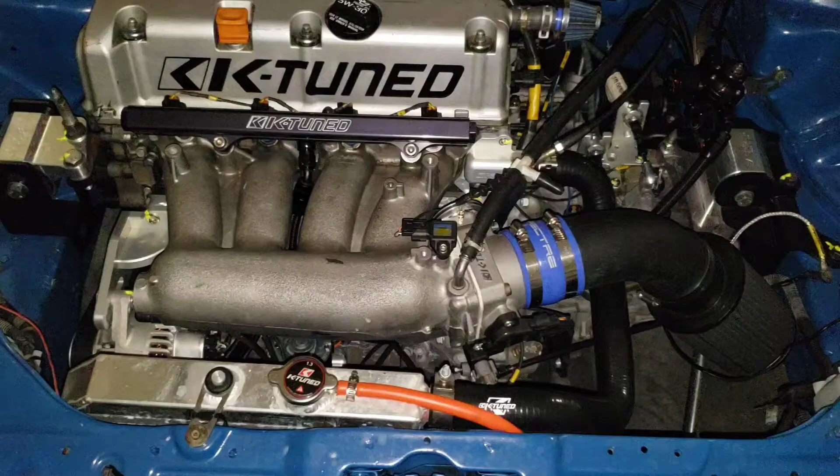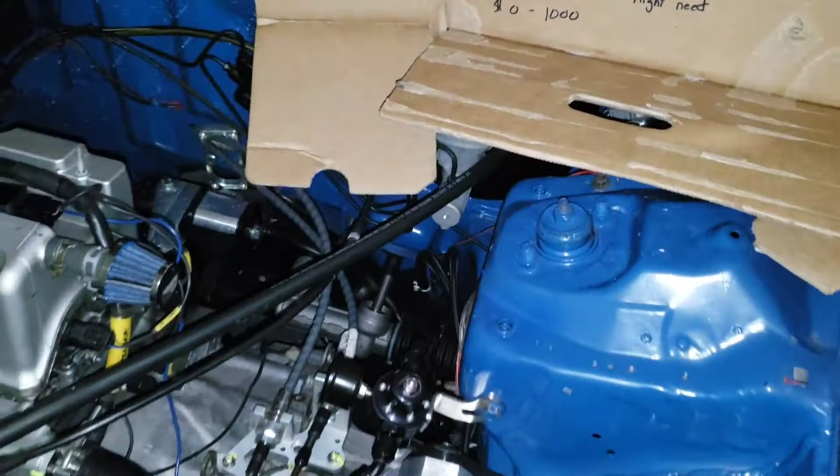Guys, today I'm going to be teaching you the cheapest way to do a K-swap on a 92 to 2000 Civic or Integra. So the first thing you're going to want to do is buy a Civic shell or the full car. Just make sure the Civic shell comes with full interior and the radiators.

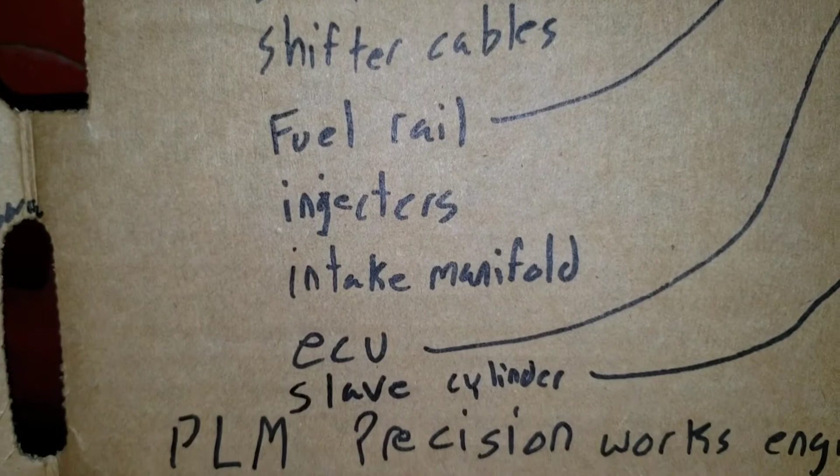Next, you're gonna want to buy a donor RSX Type S, which you can get from an auction for 500 to 1500 bucks. From that, you're gonna need a K20A2, the 6-speed tranny, wiring harness, shifter cables, fuel rail, injectors, intake manifold with the throttle body, ECU, and the clutch slave cylinder.

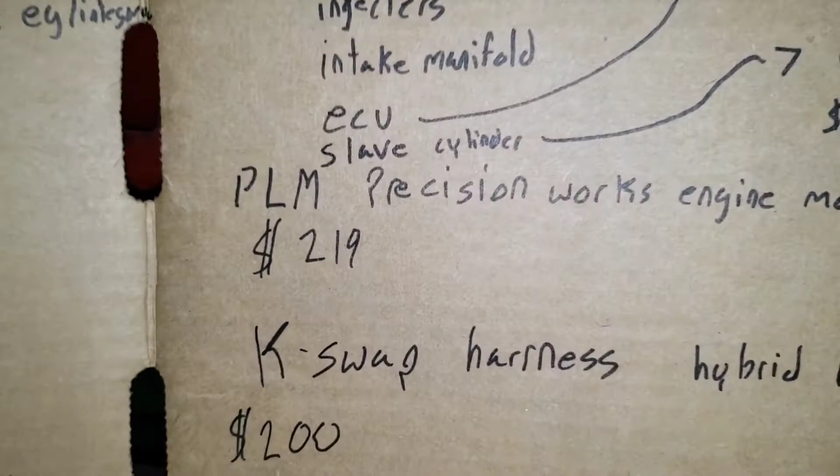After you guys have that, you're gonna want to buy PLM Precision Works engine mounts, which is the cheapest one I could find at 219 bucks. This is for the K-swap EK, and EG and Integra are the same case. EK is different than an EG and Integra. That's gonna be 220 bucks.

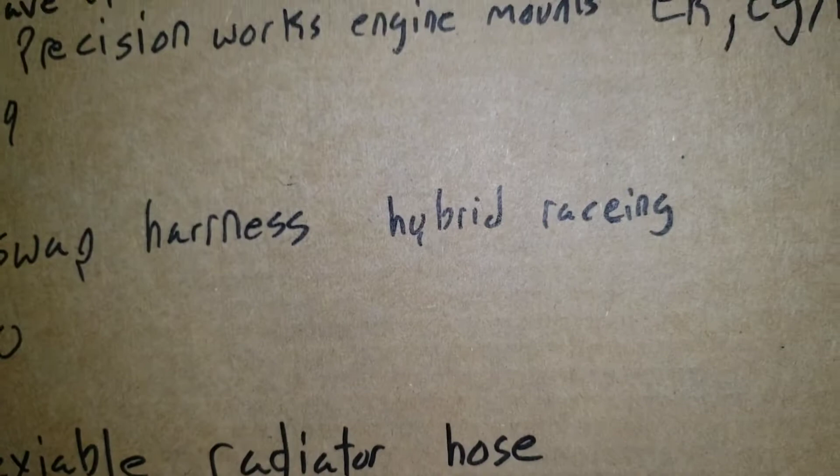Next, you're gonna want to buy a K-swap engine harness from Hybrid Racing. I found the cheapest one for 200 bucks.

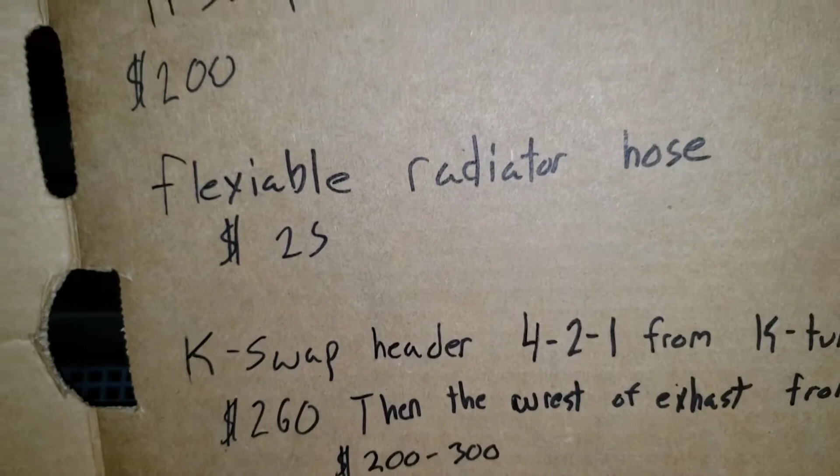Next, you're gonna want a flexible radiator hose, which each hose is gonna be like $12, so $25 in total for both the upper and lower one. And you're gonna need the K-swap headers from K-Tuned, the 4-2-1 tubular ones. They're gonna cost you 260 bucks, and then after that you're gonna want to bring it to an exhaust shop, and they'll charge you 200 to 300 for the rest of the exhaust.

Other stuff you might need might be from 0 to 1,000 bucks. You can say the maximum maybe 1,500 bucks. Like, let's say if you want to run AC, you have to buy the AC lines. You want to put a heater inside your car, so you're gonna have to buy the heater hoses and stuff like that. If you have any questions, like for the power steering and AC delete kit, stuff like that, just tell me in the comments below and I'll answer all of your comments.

So next, let's say if you buy an EG or Integra shell, you don't need nothing else. But if you buy an EK shell, you're gonna need the subframe from an EG and a steering rack from an EG, and you're also gonna need the steering to the rack union from an EG or Integra.

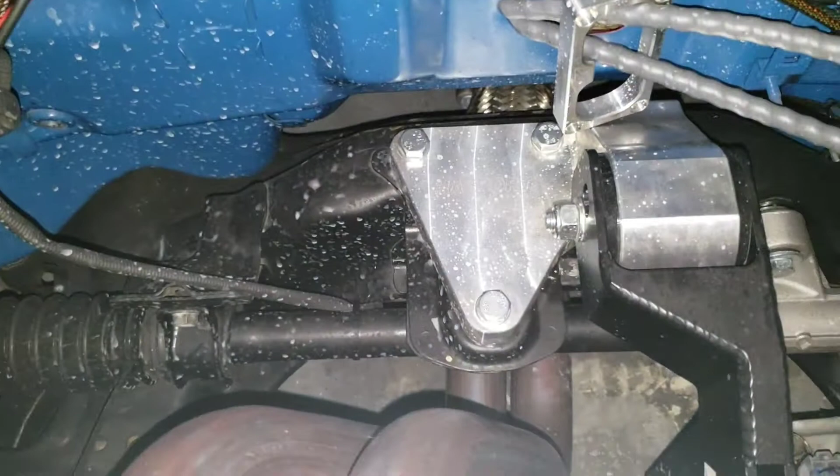Now, if you guys are gonna buy a power steering subframe, you're gonna need a power steering rack. If you're gonna buy a manual steering rack, you're gonna need a manual subframe. The two subframes are different on this mount right here, because on a power steering one, this mount is a lot larger than the manual one.

So make sure if you buy a manual steering rack, it's the manual steering rack with the manual subframe, or a power steering rack with a power steering subframe. They're two different things. But you can go to a junkyard and pull both of them out at the same time, just make sure it's from a 92 to a 95 Civic, because the EG Civic is 92 to 95 and the EK is 96 to 2000.

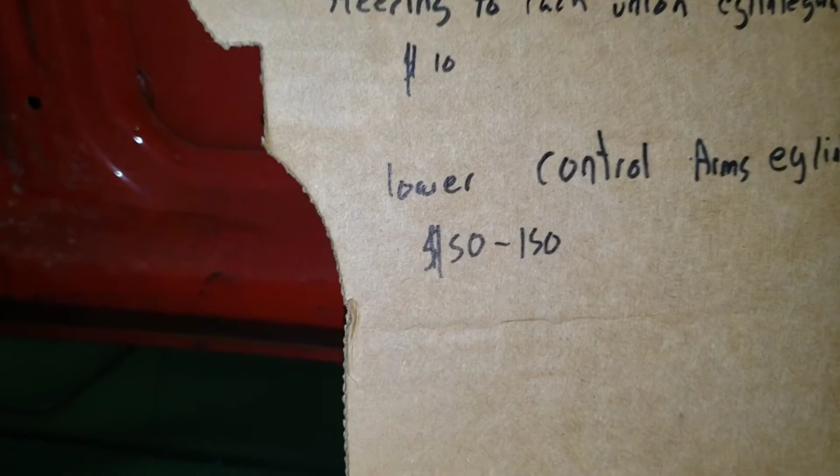You're also gonna need the lower control arms, which you can pull out at the same time. That in total should cost you like 300 bucks maximum. The minimum it can cost you is maybe 100 bucks, maybe even less.

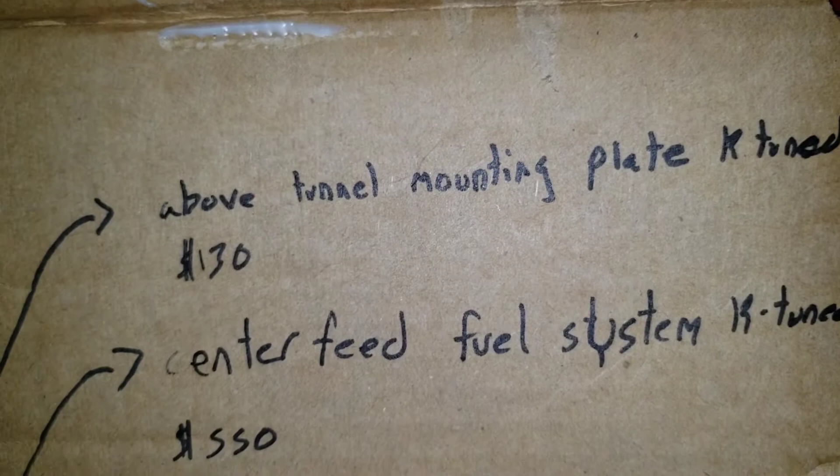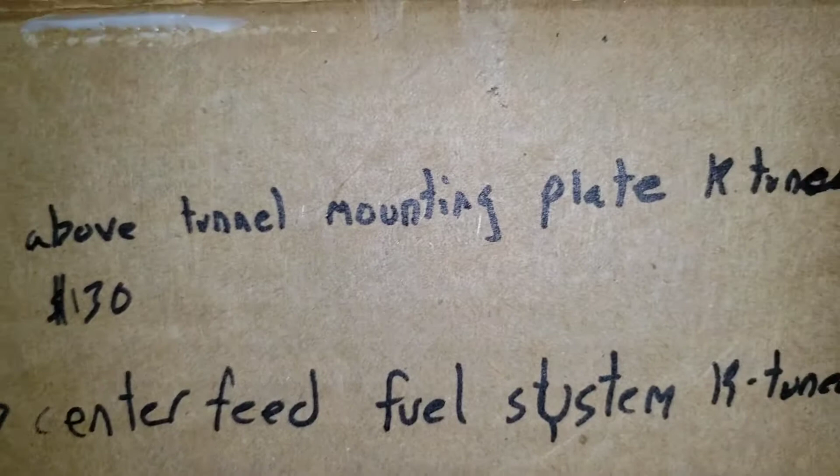So after that, let's go over here. So for your shifter, you do not need this, but if you really want to not cut up the tunnel of your inside of the car, you can buy this. If you don't care about the car that much, you don't really need this. The above tunnel mounting plate from K-Tuned is just a plate, and it's 130 bucks. Let me show you.

So this is the shifter on top. I have the race spec shifter, and the plate that's down below right here, this one, you can get for 130.

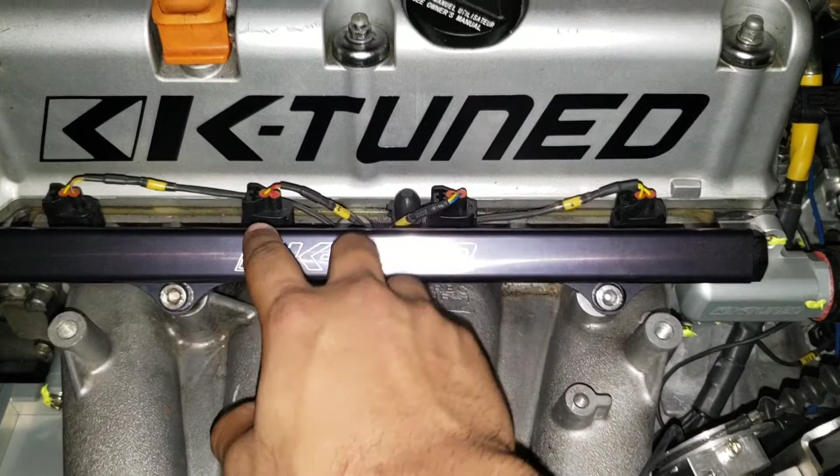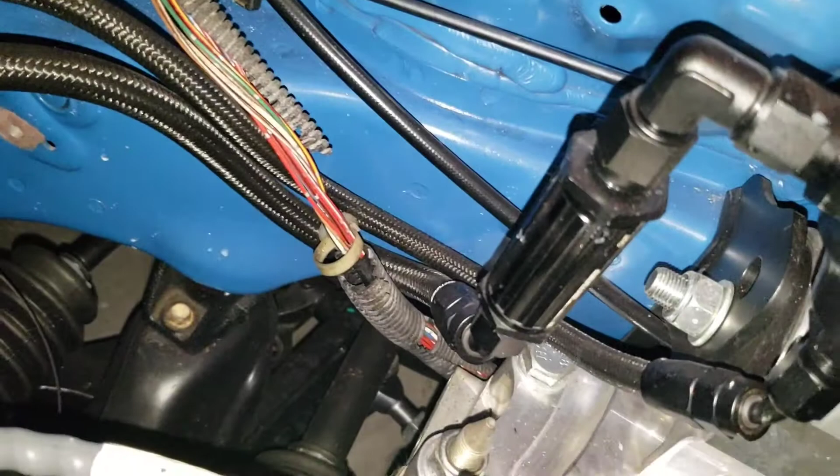Next thing you're gonna need for the fuel rail, you don't need this either, but the center feed fuel system from K-Tuned makes mounting everything up easier, because it's just the fuel rail, and then it goes down to the line all the way down to the regulator. The regulator, I can regulate the PSI, which is also included, and the fuel filter is also included, along with the line that goes up to the factory solid lines. But you don't really need that if you get the RSX from the donor.

Next, you're gonna need the Hondata K-Pro V4. It's gonna be $650. You already have the ECU from the RSX that you got, so the K-Pro is gonna be $650. If you do not have the ECU, then it's gonna be like $1,000 to $1,200, and/or you can get the immobilizer, which is $170. I recommend the Hondata, because you can tune the car to your environment area. So I recommend going for the Hondata.

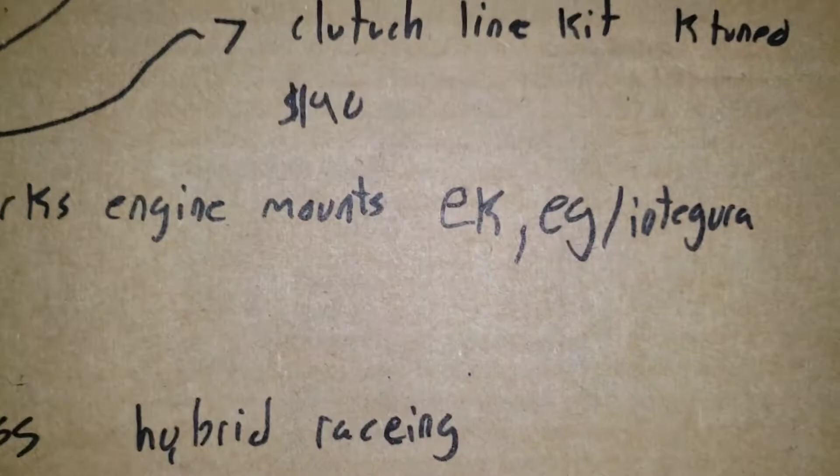Next, for the slave cylinder, you're also gonna need the clutch line kit. I have the clutch line kit right here. That's the slave cylinder right here that goes on the transmission, and it goes to the clutch master cylinder, which is back there. You're just gonna need the lines for that, which is gonna be $140. And that's it for the K-swap, EG, EK, and Integra K-swap video.